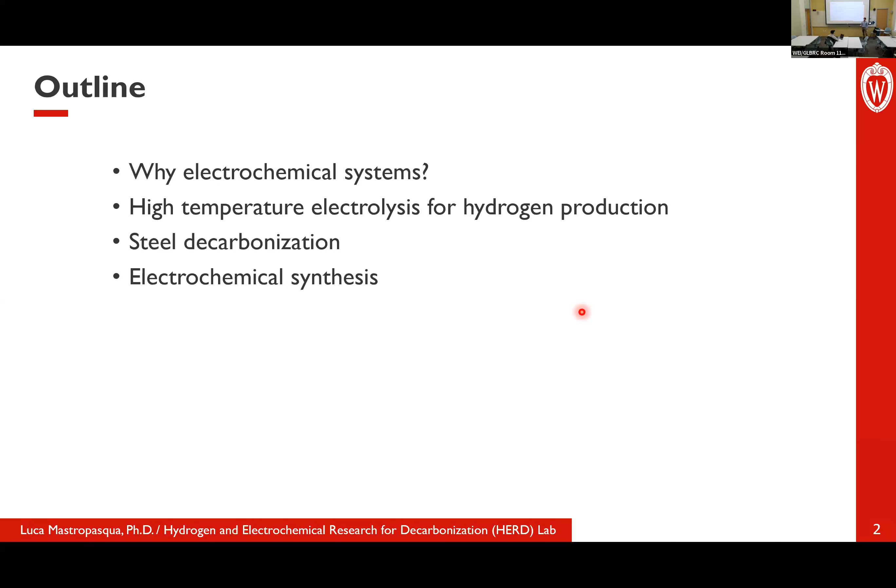The outline of my presentation is as follows. I'm going to talk about why we need electrochemical devices and systems to decarbonize these applications. I'll give you the example specifically for hydrogen generation, which is one of the main energy carriers that I think we will need to decarbonize some of the hard-to-abate sectors. I'll give you the specific example of steel decarbonization, and then I'll end with a few examples related to electrochemical synthesis of products, fuels, and commodities that we use extensively in our society but still need to find a way to decarbonize.

One disclaimer is that the story I'm about to tell is complicated, with a lot of plot twists, not a very linear plot. There's not going to be one single solution for any of these things I'm going to tell you. The result is unexpected, and that's why we still need a lot of research to figure this out.

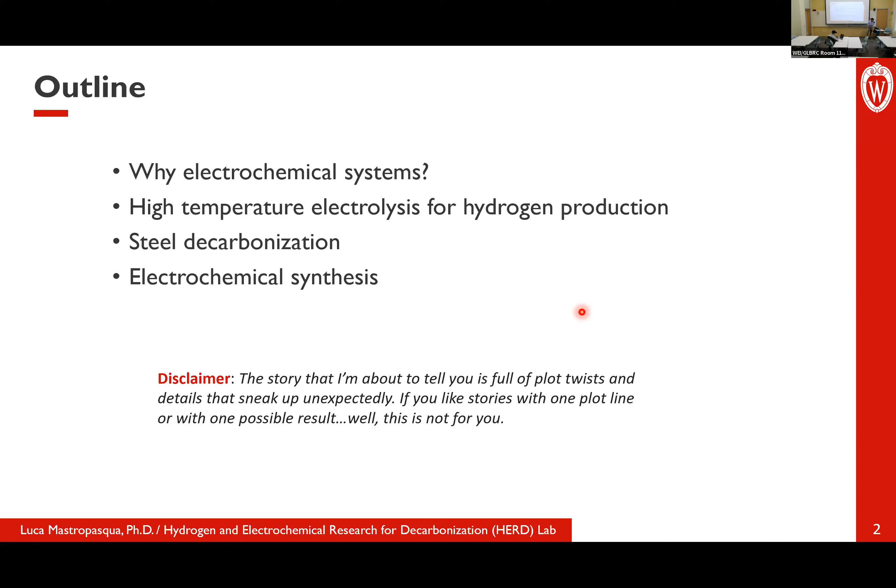So the motivation for all this is that electrification of processes can be an economic way of defossilizing our society. I say defossilizing and not decarbonizing because a lot of these processes will still need carbon, or molecules that are carbon-based, to perform all the processes that we do today. So the main goal is really to remove fossil fuels from these manufacturing and industrial processes, and produce the same type of feedstocks these processes need in a renewable or low carbon fashion.

Electrification is one way, and the reason it could be one of the ways is that we've seen costs of solar and wind coming down very rapidly in the past few years. On the left-hand side, utility scale PV of different technologies has decreased very rapidly, and a similar thing can be seen for wind on the right-hand side. I like this chart on the right because it shows the power purchase agreements for deploying wind resources compared to gas prices, shown as dashed lines. So today, deploying wind or solar resources is really equal to, if not more competitive than, purchasing gas.

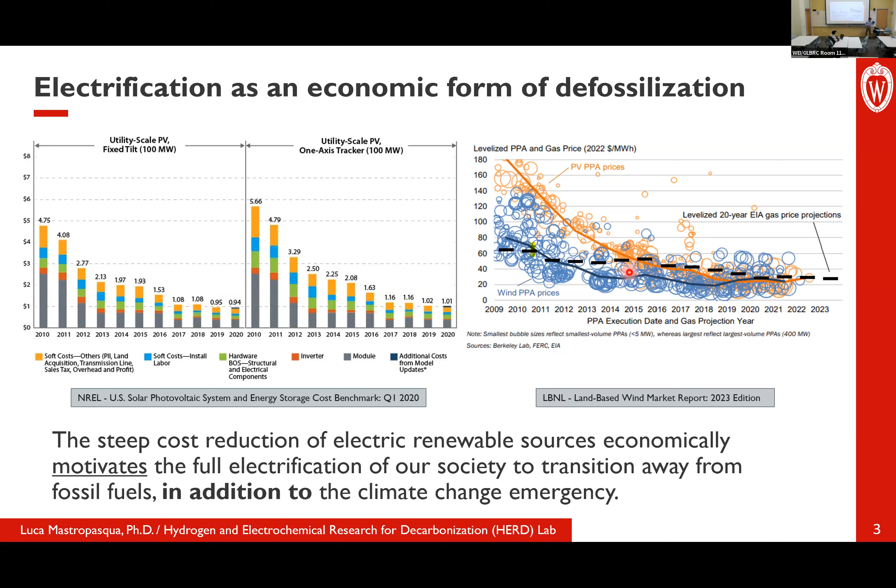So the question at this point becomes, can we electrify everything? And what are the processes that are the most difficult to decarbonize or defossilize? Can we decarbonize our whole society with electricity?

On the left-hand side of this slide, you see the greenhouse gas emission by sector. Most greenhouse gas emissions come from energy use, and the big slice of that comes from energy use in industry, the top right part of this pie. Most of it is used in iron and steel, chemicals production, oil refineries, cements, plastics, paper, glass - the heavy industries that use a large portion of the energy in our society. Similarly for transportation, the majority of CO2 emissions come from road transport.

Don't confuse road transport with cars. Road transport is mainly heavy duty trucks and buses and diesel trains. In addition to that, we have the even more difficult sectors like aviation and shipping.

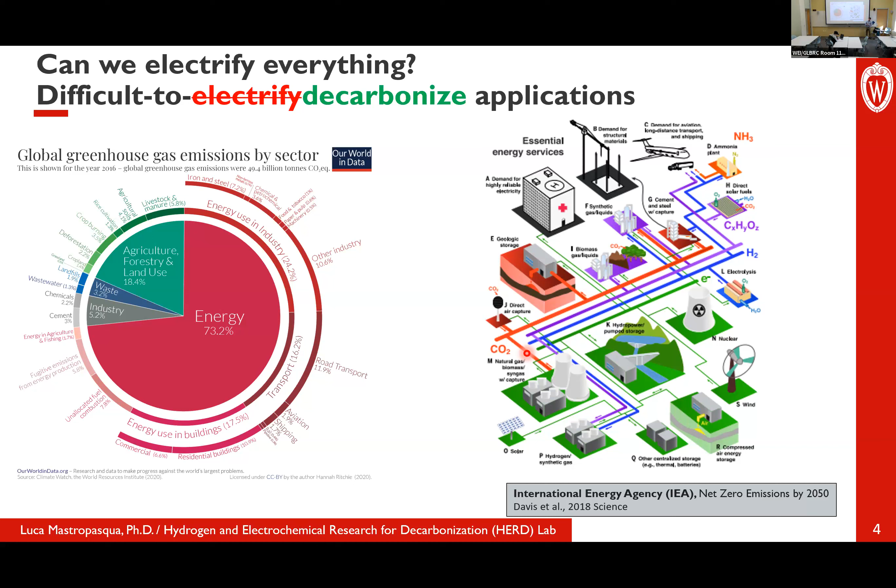So the future society that will be able to decarbonize hard to abate sectors is one that, as reported in this paper, uses a lot of renewable or low carbon energy carriers. In this figure, you see services like aviation, cement production, or steel production that use all these flows of molecules, including hydrogen, some hydrocarbons (the purple line), some ammonia, some chemicals, and CO2 (the red line). Those are flows of molecules, of feedstocks, that we will need as input streams to some of the hard to abate sectors we need to decarbonize.

So again, the question is: what is the role of electricity? How much can electricity help us decarbonize these hard to abate sectors? Here are some examples.

Here you have cement production. In order to produce cement, currently we use furnaces that go up to 1800°C, and we need natural gas or coal as a source of energy in the furnaces, in the kilns. We need electricity to power some of the auxiliary processes, and we need limestone. Limestone is one of the main material streams, and its formula has CO2 in it - CO3. So that input stream, if you oxidize it or convert it the way the kilns do today, releases CO2 because it contains carbon and oxygen in the initial molecule. So even if we didn't use natural gas or coal to power the furnace, we would still emit CO2 because the nature of the process itself emits CO2.

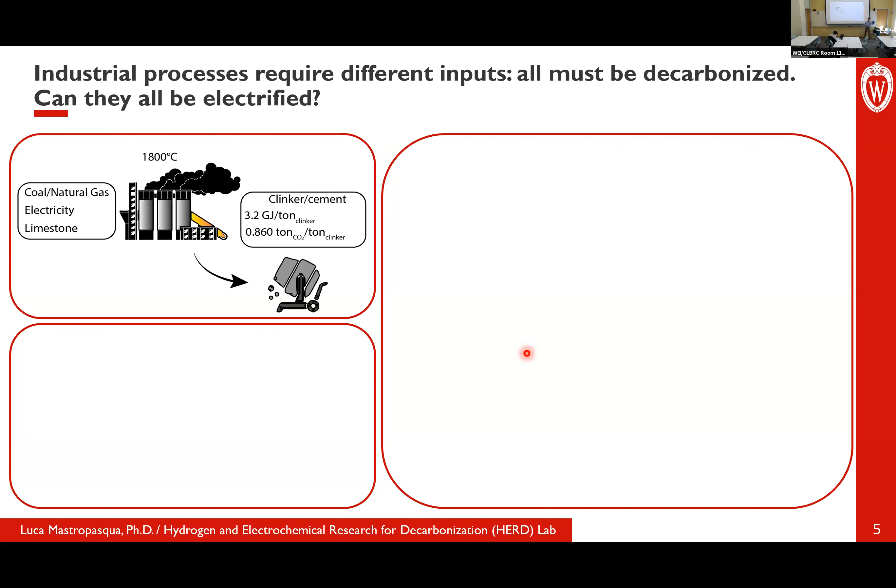Steel is similar. To produce steel, we need furnaces that go up to 1200-1400°C. Currently they use a lot of coal and natural gas to increase the temperature. We need electricity, we need iron ore as an input stream, but we also need carbon. Carbon is another input needed to produce steel because the final product is carbon steel - it usually has between 1% and 3% mass of carbon in the final product. If we didn't have that carbon, all the downstream steel making processes would have to be completely reconfigured and redone.

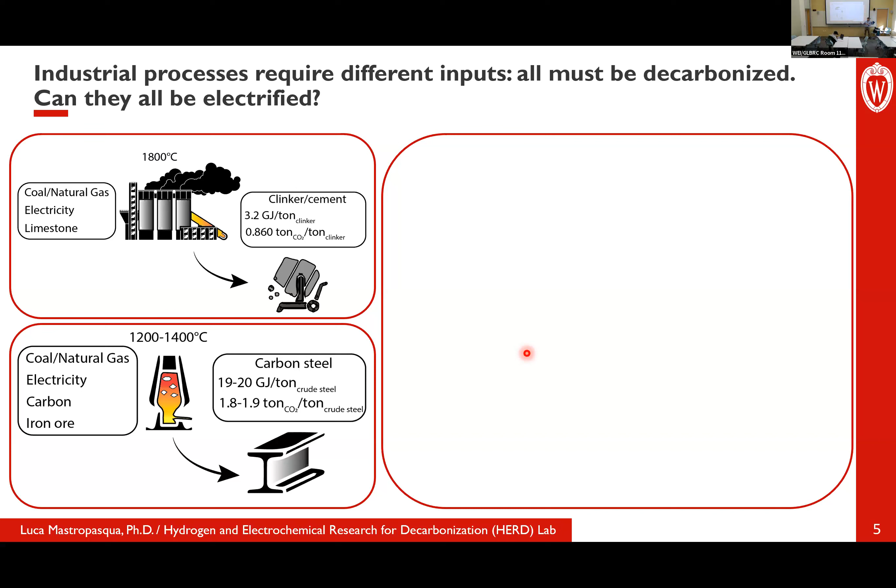So the carbon is important in the steel product, and so in order for this transition to be even feasible, we need to be able to remove or replace the furnaces with processes that can produce similar products.

The last example I bring here is chemicals and fertilizers. For the production of ammonia, we need the Haber-Bosch process that operates around 450 C, and needs natural gas, electricity, and nitrogen. The natural gas is needed both for increasing the temperature of the process and as a feedstock to produce hydrogen. Ammonia is NH3, and the hydrogen content in ammonia comes from natural gas, which is used here as a source of hydrogen.

This is to produce ammonia. Ammonia is then used as a feedstock itself to produce fertilizers. To produce fertilizers, you need urea, and urea has carbon, which means you need to add carbon to ammonia. So if you want to produce fertilizers similar to what we have today, there must be somewhere in the process a point where you inject carbon with ammonia to produce urea.

So the point of this slide is that we can use electricity to do a lot, but we will still need a lot of input streams or molecules that will need to be produced in a low carbon fashion, despite the fact that these will contain carbon in the chemical form.

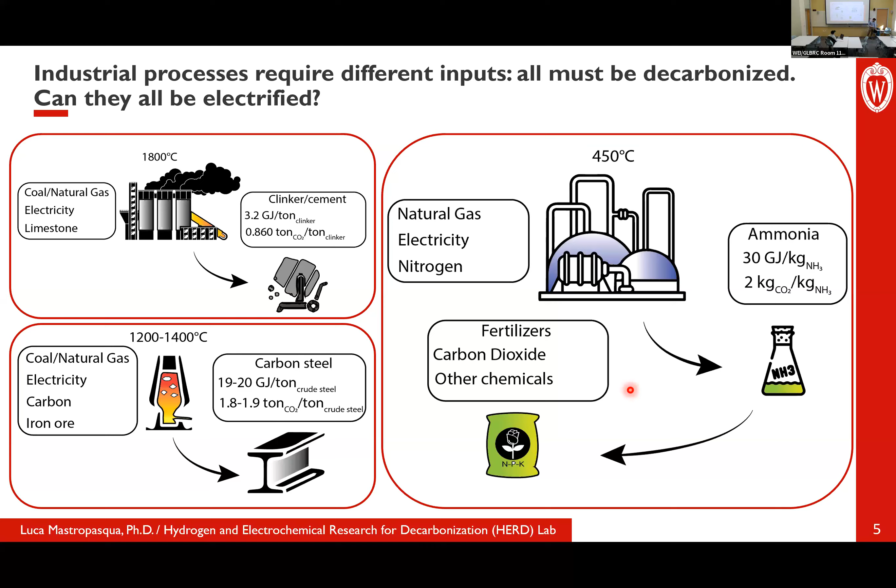Here the electrochemistry comes in. The proposition is to completely change the paradigm of how we produce chemicals and commodities, from business as usual, where we use fossil fuels to power our transportation, manufacturing, and industrial sectors with minimal improvement in energy efficiency, to one that produces sustainable energy carriers.

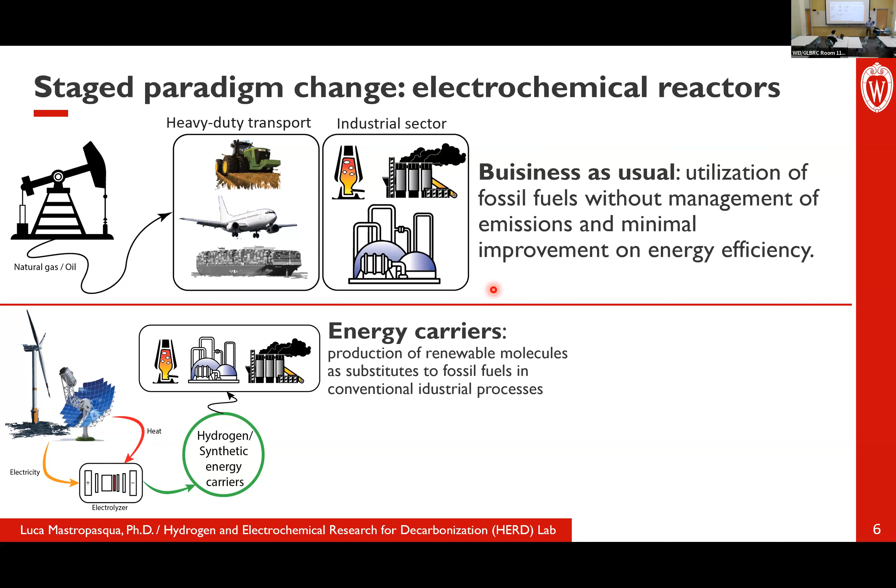Energy carriers, in what I do for my research, are produced from renewables, solar or wind, via electrochemical processes using reactors called electrolyzers, which use electricity and renewable heat as input to produce hydrogen, one of the main energy carriers, or other sustainable or synthetic energy carriers that can replace fossil fuels for the processes I talked about earlier.

The even longer term transition would be to come up with new electrochemical processes that could do the production of commodities directly in one single step, what I've called electrochemical manufacturing.

Imagine an electrochemical reactor that would take renewable heat and electricity, and directly carbon, limestone, iron ore, or nitrogen, similarly to the processes I explained earlier, and directly produce steel, ammonia, clinker, cement as a commodity. This is the very long term, not commercially ready pathway yet, but it's the research area I'm focusing on.

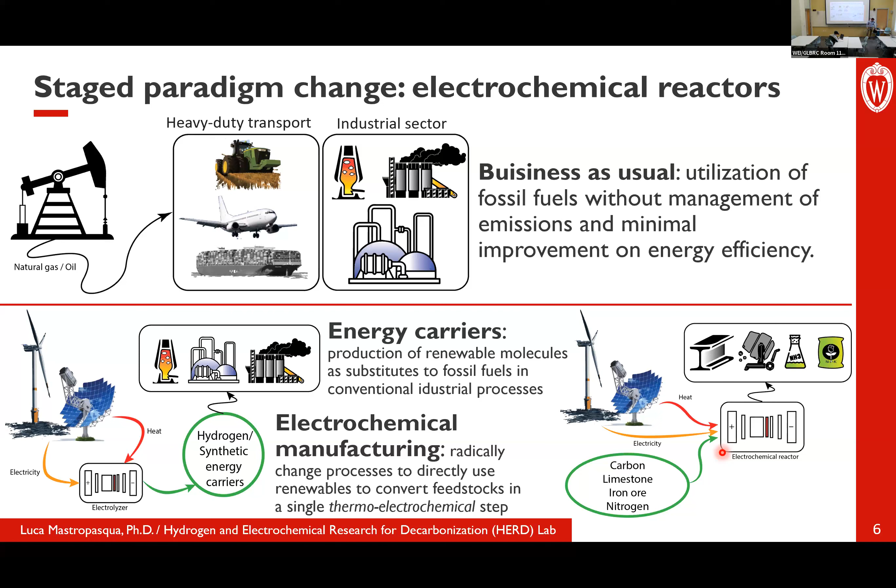Now I'm going to give you one more detailed example of hydrogen production using high temperature electrolysis coupled with high temperature heat sources and renewable electricity.

To do that, I first introduce the device, which is a solid oxide electrolyzer. This is one electrolyzer technology that can use electricity and heat, and the heat portion is important, I'll come to that point in a little bit. A solid oxide electrolyzer is comprised of two electrodes, an anode and a cathode.

The cathode receives steam as an input, so you evaporate water and produce steam as your input to the cathode side. The anode side receives air as an input. Again, at high temperature, these systems operate at around 750 C, so you have to increase the temperature of your input streams. The steam is then split using input electricity, which comes from your wind farm or solar PV.

The steam splits into hydrogen and oxygen, and the oxygen is transported through a membrane, which is your electrolyte in this case, and recombined on the anode side. So the anode produces an oxygen-rich stream at the output, and the cathode at the output has hydrogen, pure hydrogen, plus some unreacted steam. That unreacted steam can either be recycled back to the input or simply condensate out, and you would have a stream of pure hydrogen.

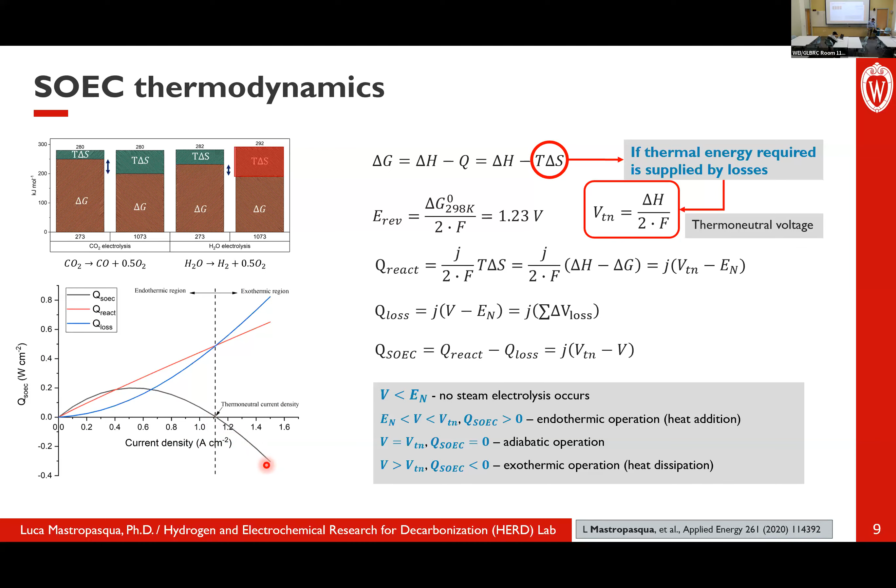Beyond that point, the system becomes exothermic. The Joule heating processes will more than compensate the endothermicity of the reaction, so the system will start producing heat. So for thermal integration, it's really more interesting to work in endothermic conditions, because you can take advantage of the integration with renewables, especially renewable heat.

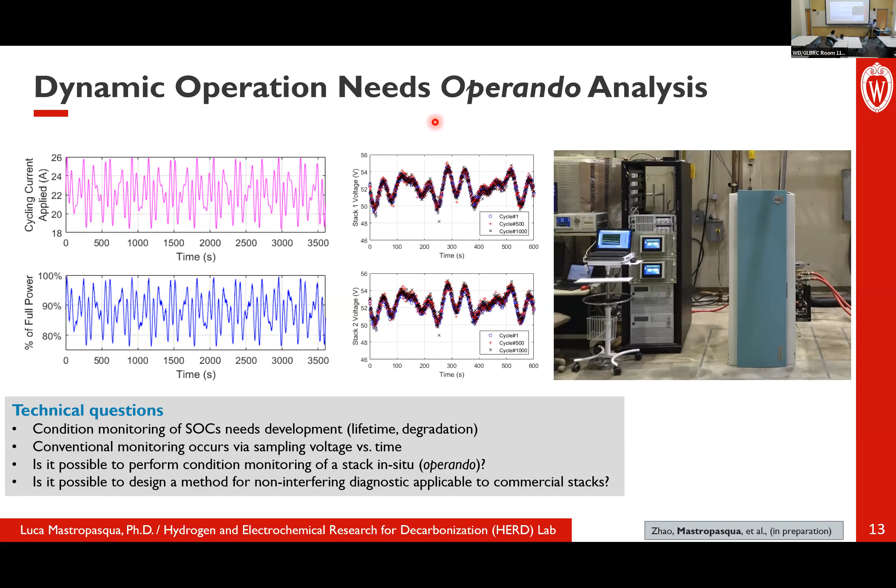The title here, though, says that we need operando analysis tools. And that's what we did afterwards. We looked at how these systems operate in very fluctuating conditions and used operando analysis, operando characterization.

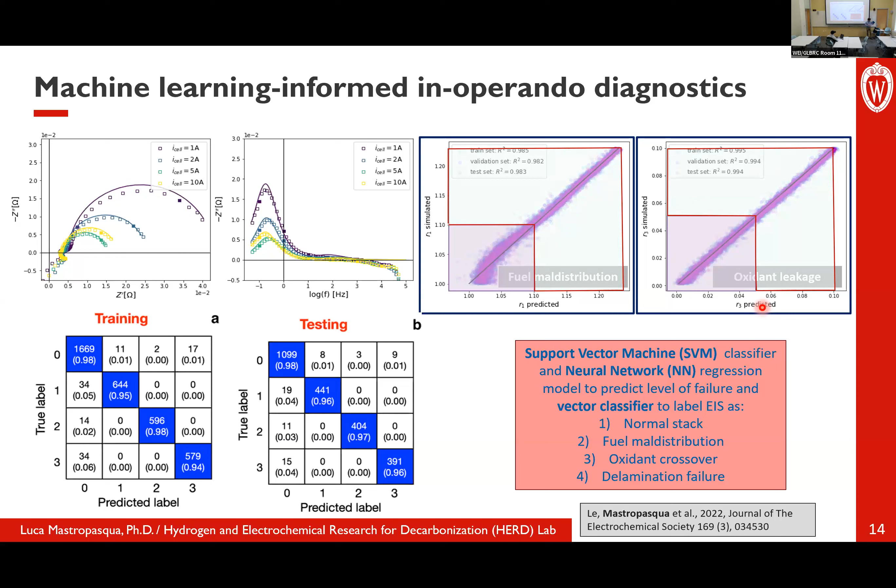All right, so this was hydrogen production, which again is one of the main building blocks and main energy carrier for some of these hard-to-abate sectors. Now I'm going to talk about one specific application, which is steel.

Steel today is produced using what are called blast furnace, basic oxygen furnace mills. The process takes iron ore, brings it to a pellet size, and feeds it into a blast furnace that uses limestone and coke as input feedstock. That's not just, as I mentioned at the beginning, to increase the temperature of the unit, but it's also a mechanical support. The coke, because it's a solid product, helps the mechanical stability of the fixed bed reactor, which is the blast furnace. So it's really hard to remove coke because it's not just a fuel source.

The blast furnace produces metallic iron, and then it goes into the steel making process, which could be an electric arc furnace or a basic oxygen furnace process. This is the way more than 70% of the steel we produce today is produced, and it's really energy intensive. It consumes about 20 gigajoules per ton of steel of primary energy, and it's really carbon intensive, emitting around 2 tons of CO2 per ton of steel.

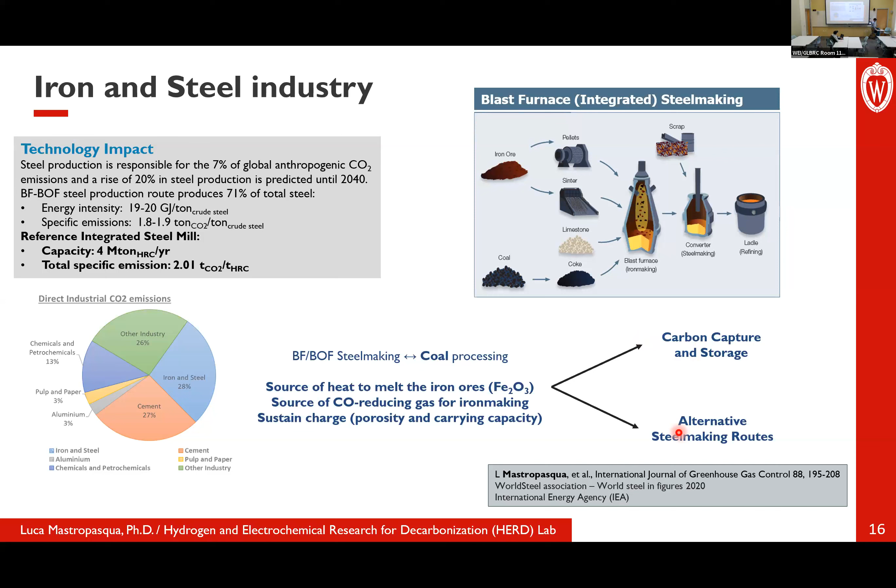By the way, the first method, the carbon capture process, we also looked at that, and it's reported in this publication as one of the viable methods. There is certainly an economic aspect to consider.

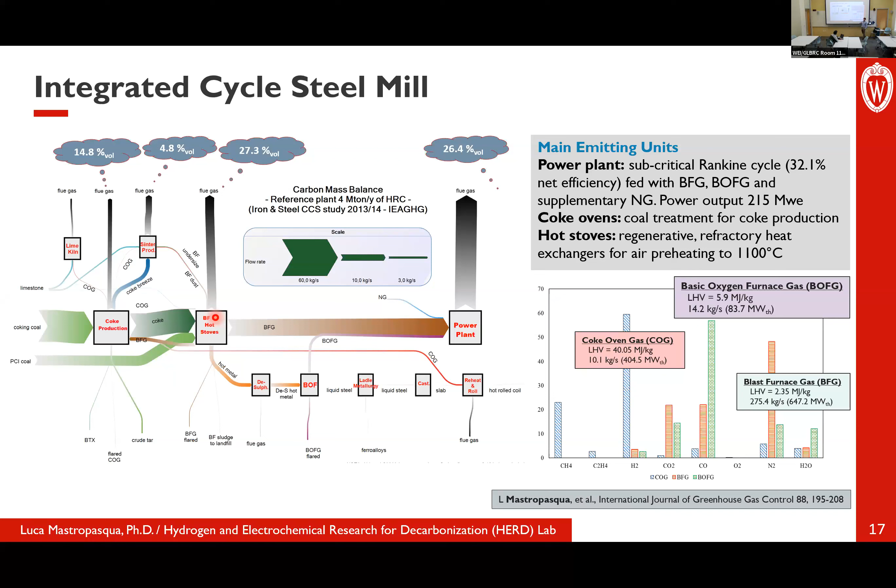So we looked at carbon capture and storage solutions, and it is possible to apply carbon capture and storage downstream of the blast furnace steel mill. But you have many carbon sources, many flues or stacks in a steel plant, so that means each of those needs to be taken and the CO2 abated from them.

So our proposal was to change process and use what's called a direct reduced iron process, or DRI. This is not a completely novel idea. DRI is a fluidized bed reactor which uses a reducing gas, like hydrogen or CO, or a combination of those, to reduce iron ore. Iron ore is fed at the top of the reactor, and as it falls down the reactor, it is reduced by the reducing gas stream fed at the bottom, so the oxygen is stripped away from the iron ore. At the bottom of the reactor, you end up with metallic iron, and then you can just add carbon to produce that carbon steel I mentioned at the beginning.

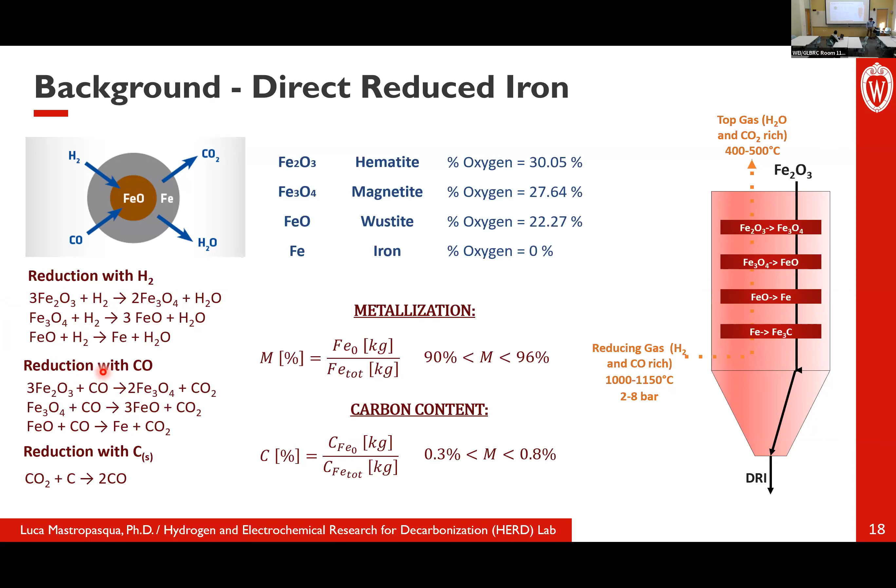I'm going to skip this for sake of time. So the process we proposed uses an SOEC that takes the top gas or exhaust gas of a conventional DRI furnace. It preheats that gas and feeds it to the cathode of the SOEC. Remember, the cathode is where you feed the steam in a conventional SOEC.

So the top gas stream is relatively rich in steam, and there is some hydrogen in that composition. The SOEC converts the steam to produce a hydrogen-rich stream. That hydrogen-rich stream can be sent back to the DRI furnace, after some waste heat recovery and preheating, as a reducing gas. So this gas at the inlet of the furnace will be a hydrogen-rich gas produced using water splitting, using electrolysis. And of course, if you use wind or PV resources to power the electrolyzer, that becomes renewable hydrogen.

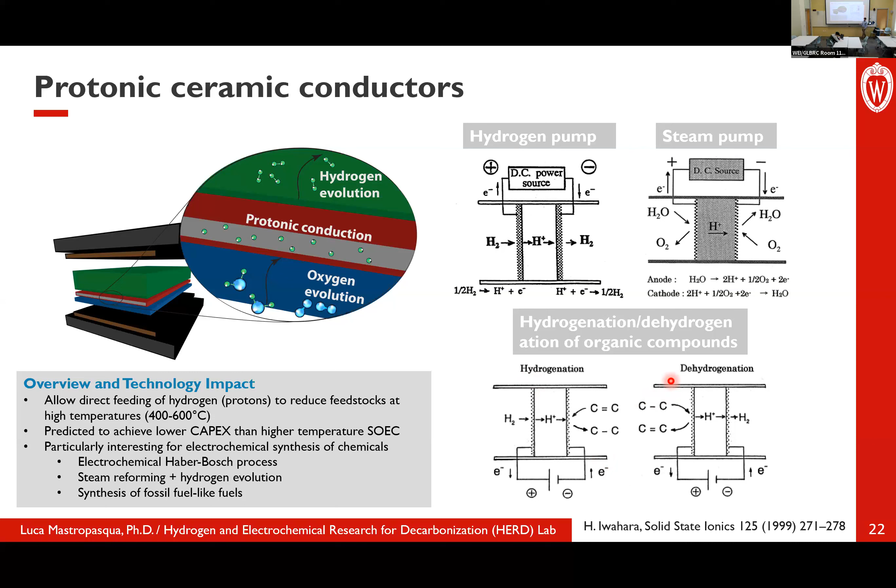One example is the production of ethylene. Ethylene is one of the most used chemicals in society because it is used as a feedstock for many downstream chemicals. So this study takes ethane and produces ethylene using one of these proton conductor cells. It dehydrogenates ethane, removing hydrogen from it, producing ethylene, and on the cathode side, it produces pure hydrogen. Using the selective membrane, an electrolyte that can transport pure hydrogen ions, you can selectively dehydrogenate an organic molecule like ethane and produce ethylene in a very selective fashion.

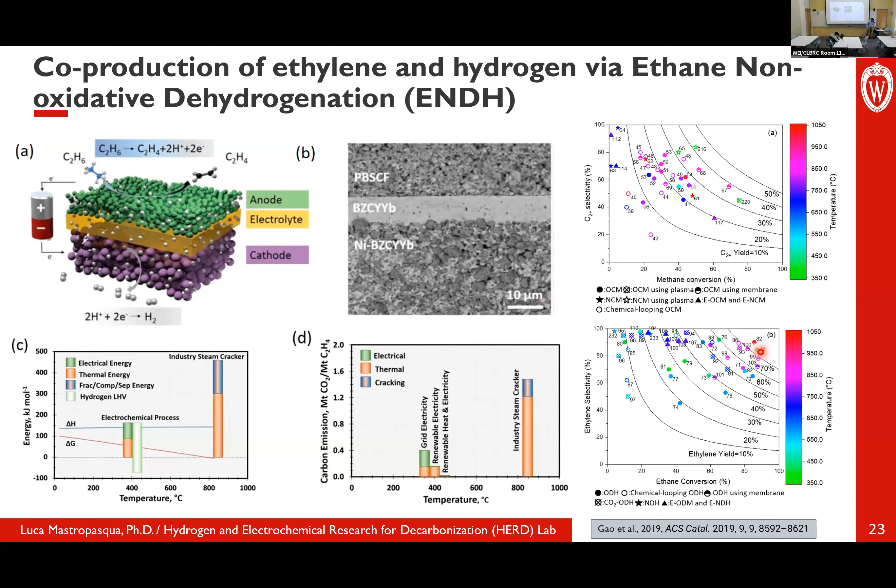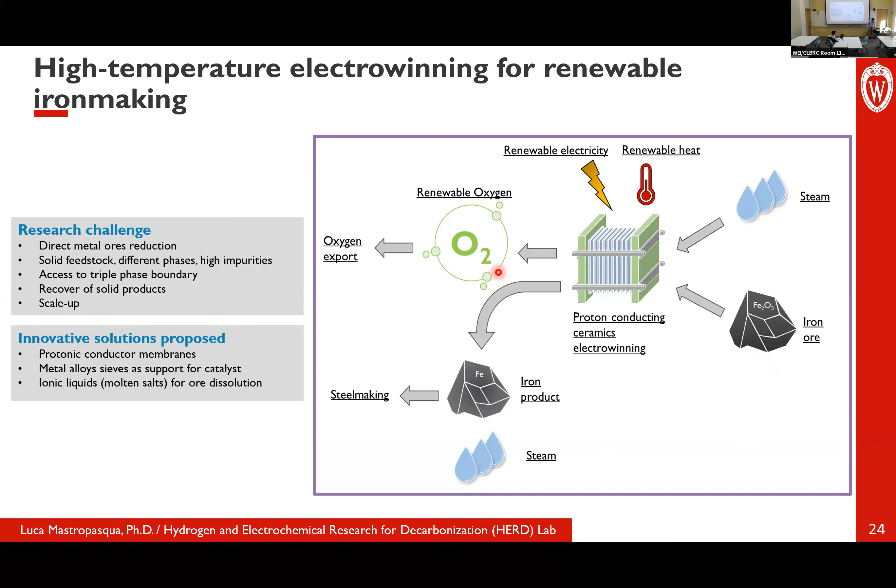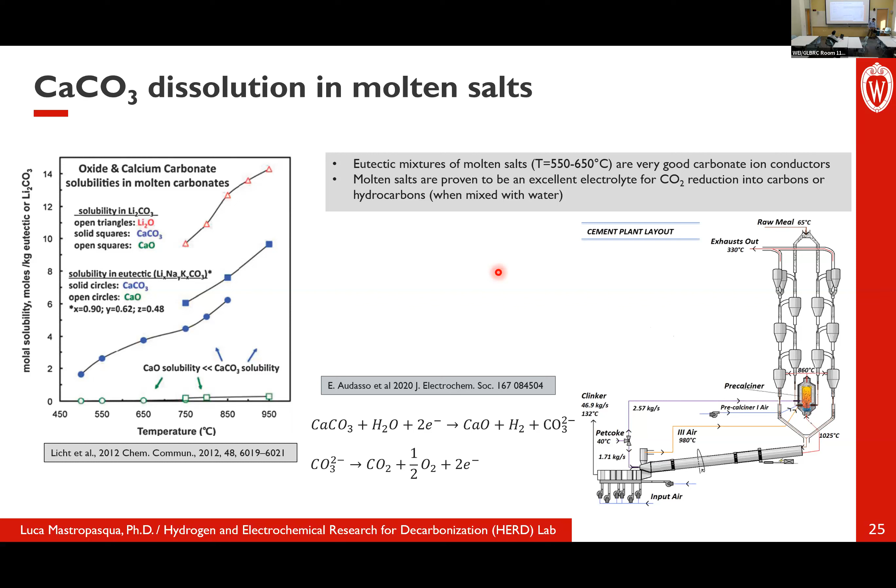Similarly for cement, many people are working on electrochemical lime production. The problem with cement is you start with limestone, and limestone has CO3 in the molecule, so when you convert limestone, you emit CO2. If you use electrochemical pathways to produce lime, you can solidify that CO2, producing solid products instead of emitting CO2 in gaseous form. That's another advantage of using highly selective processes.

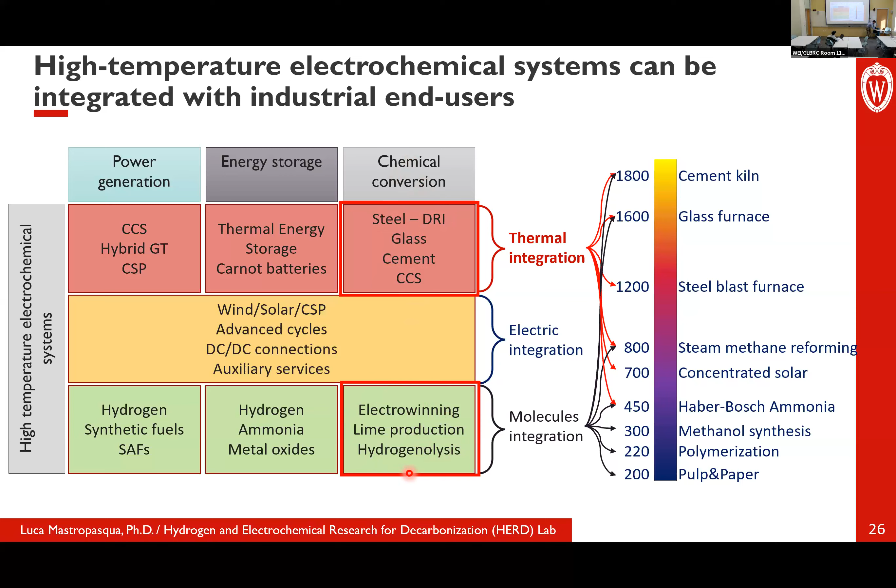So that's my last slide, and I'm happy to take any questions. Thank you.

We do have a couple questions online, so I'll read the first one. I think it goes back to where you talked about conversion efficiency. The question is, if you add the energy required for compressing hydrogen gas for storage and transportation, how much does it change the calculated efficiency? They said, in my industry, pumps and compressors are the major source of losses.

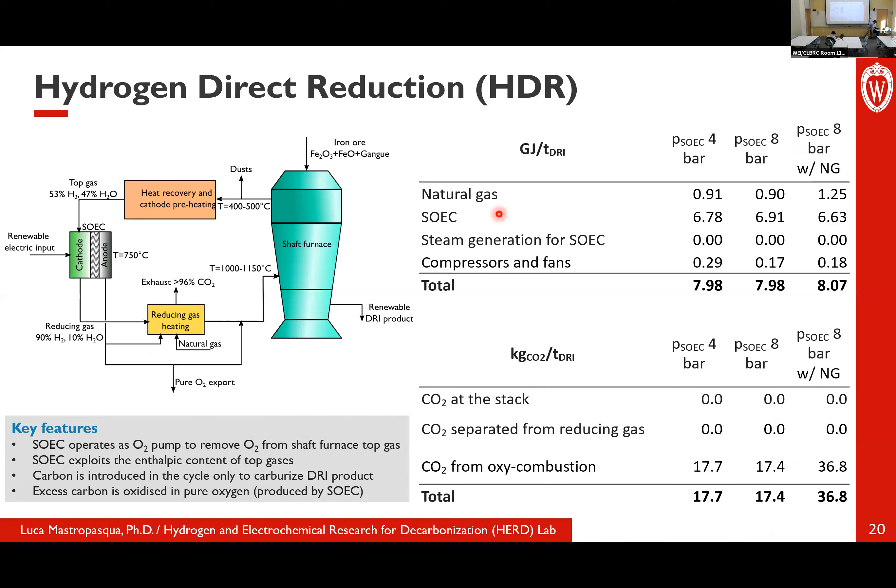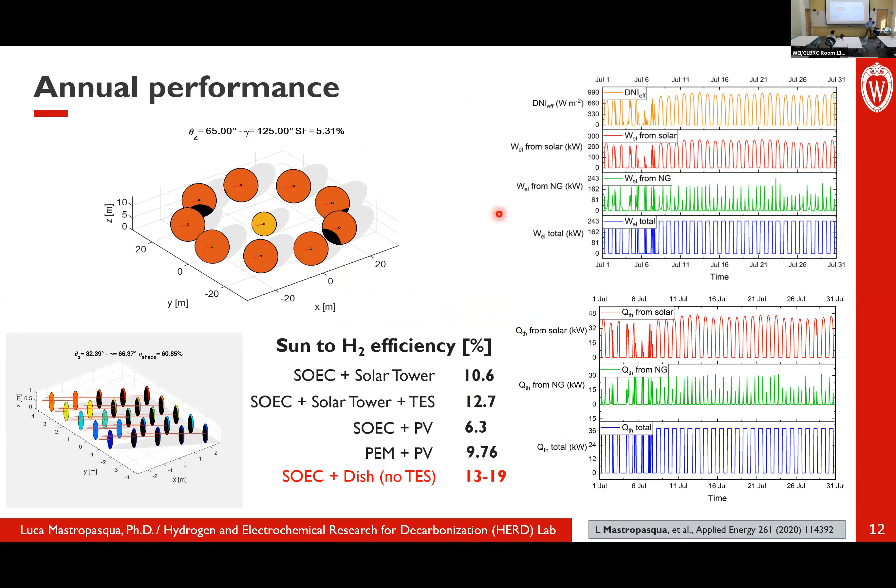So the efficiency values, I'm assuming, are related to these values. Yes, these include the compression efficiency. These two compressors here are included in the energy balance that I reported. So that 18% efficiency includes that value. It really depends on the size of the system, and how often you go off design. When you go off design, electrochemical devices generally increase their efficiency. On the other hand, compressors and other mechanical systems usually don't, or decrease their efficiency. So on a yearly basis, the effect of inefficiencies of mechanical systems is more important when you operate in off-design conditions. So the answer really depends, but for these numbers, I included the compressor losses.

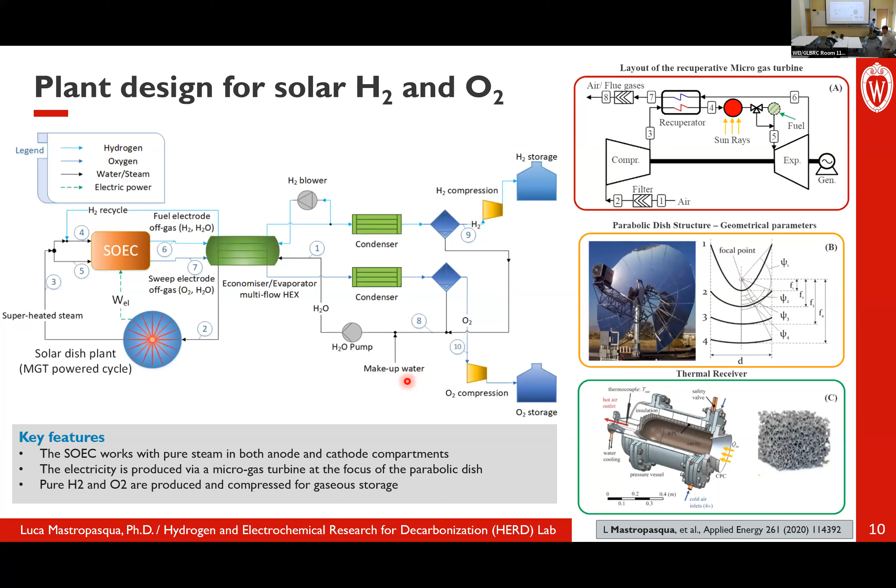In your SOEC, what is the electrolyte? What is it made out of, I guess? So the material, you mean? Yes. The electrolyte is a ceramic membrane. It's a dense ceramic membrane. The conventional material is yttria stabilized zirconia, so it's zirconia with some yttria in it.

Is the industry already set up to manufacture these at a larger scale? Yeah, so these are manufactured very similarly to batteries, solid state batteries. The manufacturing processes are quite similar. We know that batteries can be scaled up quite well and economically, so these systems can use similar manufacturing processes.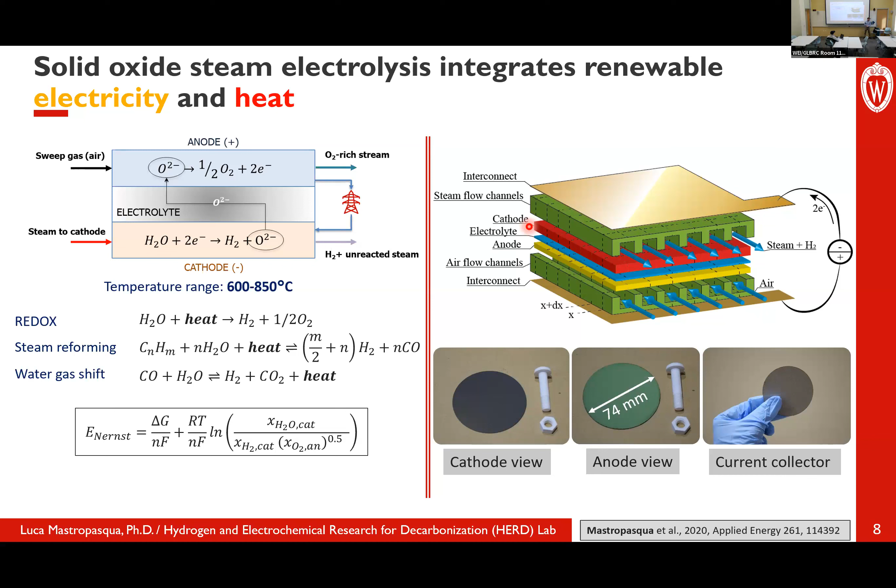A general question online is, when do you expect commercialization for a lot of these systems and devices, and what are the breakpoints for initial costs? These systems are already commercial. The SOEC, there are companies that commercialize SOEC systems. Those that are not commercial are the ones I showed in the last three slides, where the product is not just hydrogen, but a fuel or a chemical. Those are certainly not commercial, very much at the laboratory scale. In terms of costs, I don't remember if I have cost slides in this presentation.

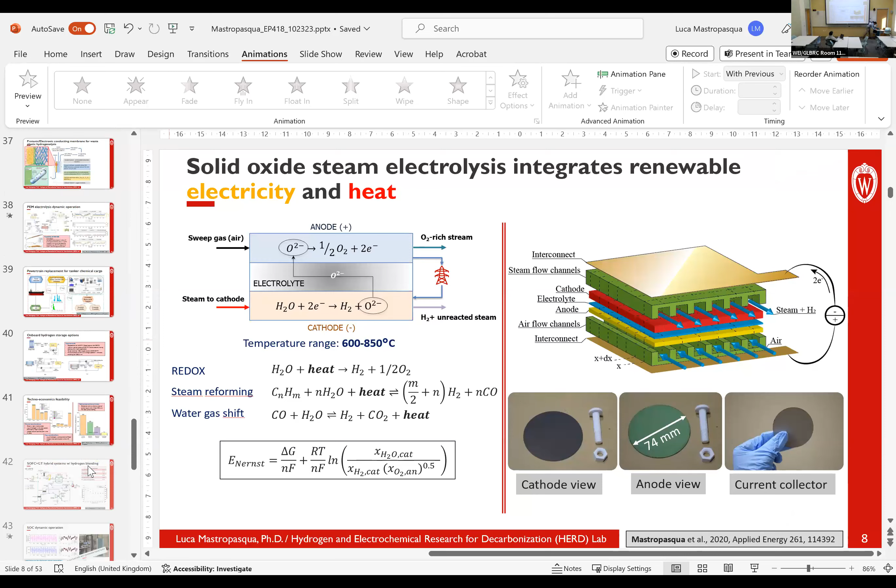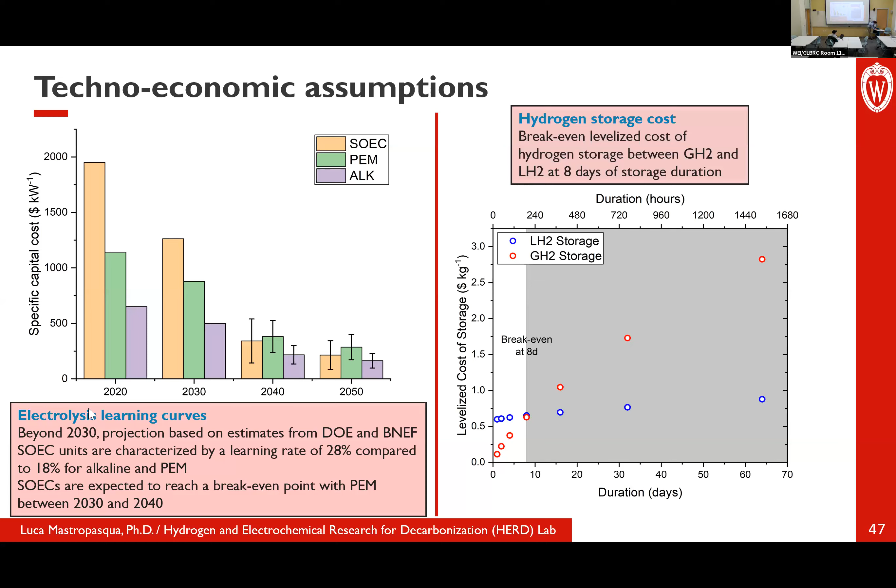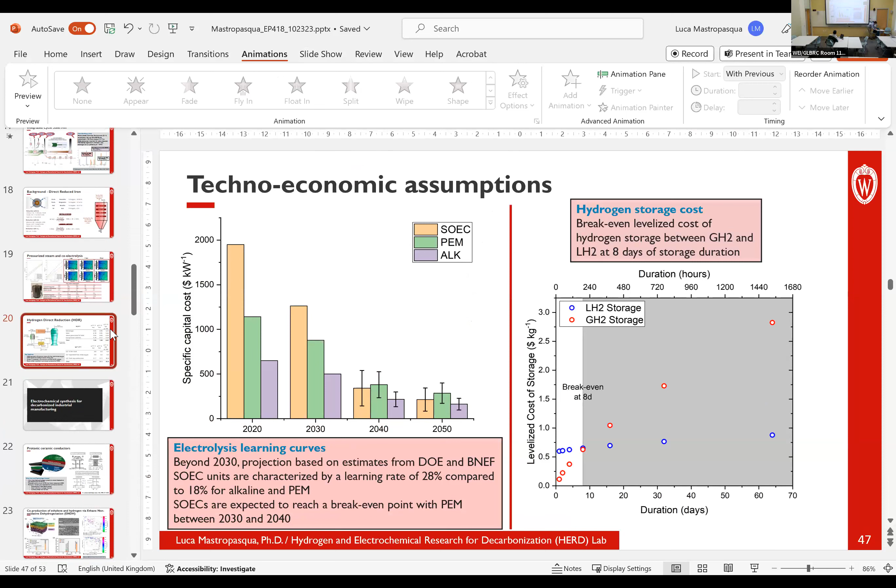Yeah, so the iSteel project is the one that I mentioned - this one here. The project is ongoing. We are entering our third year of the project, so it's the last year, and the last year is basically dedicated to the construction of the demonstration unit. We are working with an electrolyzer manufacturer that will build the demonstration unit at their site.

In this project, we don't have a steel manufacturer as a partner, so the furnace or the steel production portion of the schematic will be simulated in a hardware-in-the-loop demonstration with the electrolyzer. However, I have just submitted a few months ago another proposal for a phase 2 of this project in collaboration with a steel manufacturer, where, if awarded, we will go to a steel plant and deploy an SOEC at their site.

So this iSteel project is going well. I'm just hopeful that we'll get the phase 2 awarded so that we can actually demonstrate it in a steel plant.